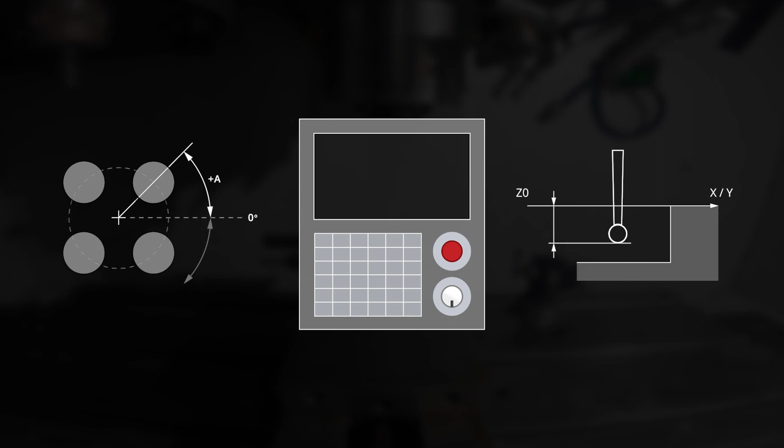To begin, we can open up Mastercam and our previous part file. For this example, we'll need to move my origin to the angled wall features so that way everything will match up. In order to do this, I'll make a duplicate copy of an existing plane and move our Mastercam origin.

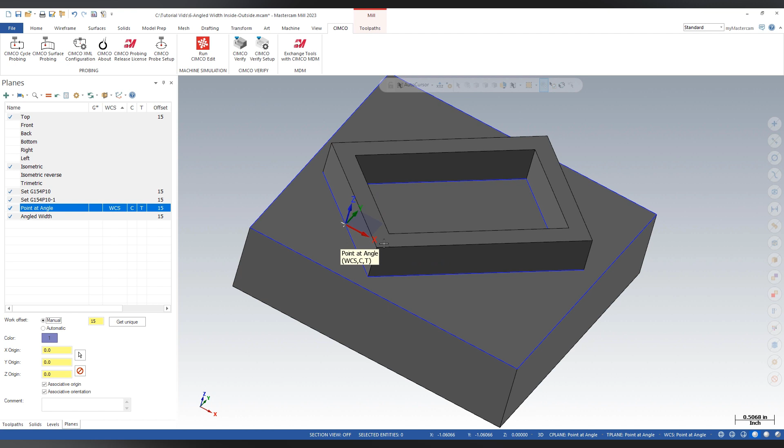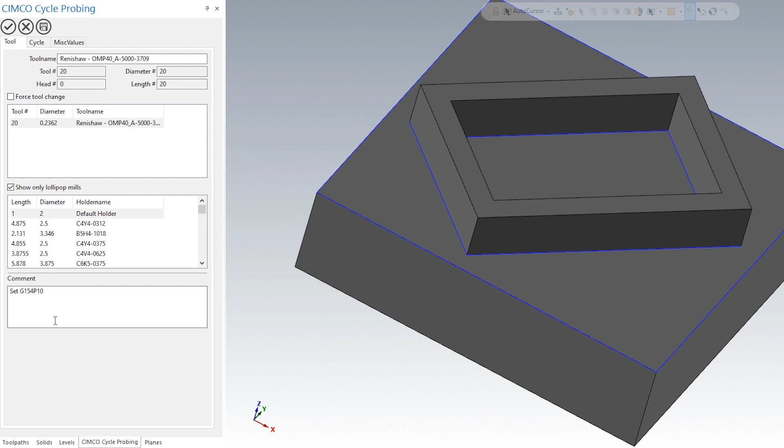We can now click on the CIMCO cycle probing icon located on our CIMCO tab and go to the workpiece datum category. We are going to start with the point at angle cycle. The workflow will be identical to our previous cycles, and because I had already selected a probe, we can bypass this and enter an operation comment if you wish. If you do not already have a probe defined, please watch our video tutorial on how to define a probe.

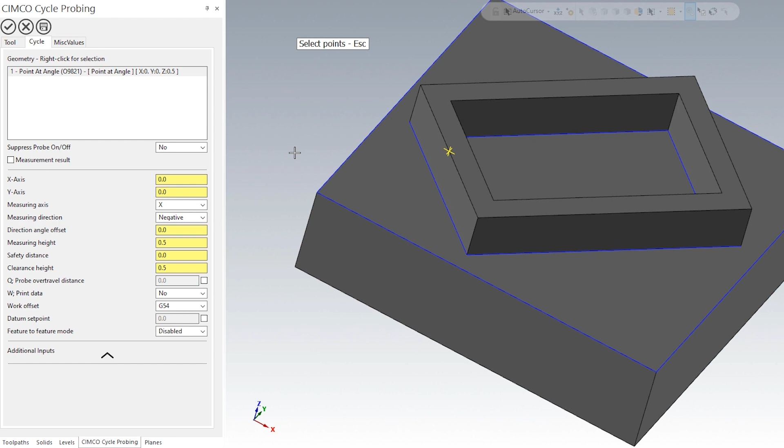Next, we'll click on the Cycle tab, followed by right-clicking in the Geometry section. You will notice that in this cycle, we have the option to select our geometry from points. This can either be wireframe and/or solid endpoints. Once we do so, CIMCO probing is associated to that geometry and we can start defining specifics to this probe path. We will set this up similar to our single axis probing cycle by setting our measuring axis to X and the direction to positive.

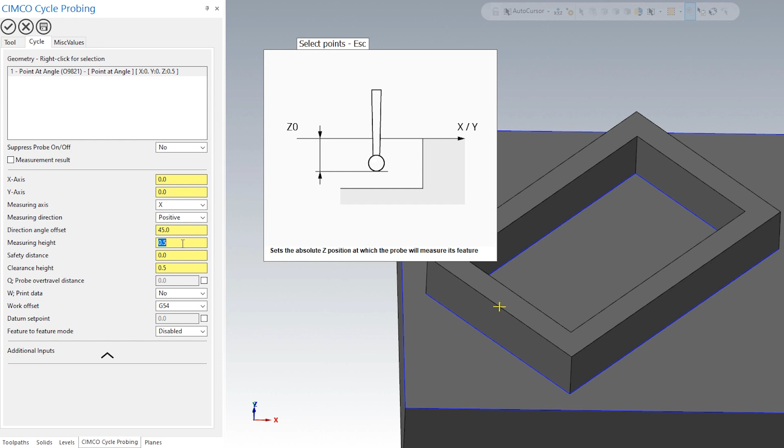We then can define the angle in which we wish to offset the probe motion relative to the current measuring axis and direction in order to probe perpendicular to the surface. We can then define the measuring height by simply typing in a number, using your right mouse button click menu and the option of Z coordinate of a point, or use our center mouse wheel to scroll up or down as this will increase or decrease the value. I will set mine to a positive 0.250.

I will then set my safety distance to a positive 0.250, as this will be the height in which the probe will stand off the surface and begin its probing cycle. Lastly will be my clearance height, which is the height that the probe will rapid to, from, and in between cycles. Now that we have the basic values input, you can see a visual of the probe path on your screen and can adjust any of the other values to get live updated feedback.

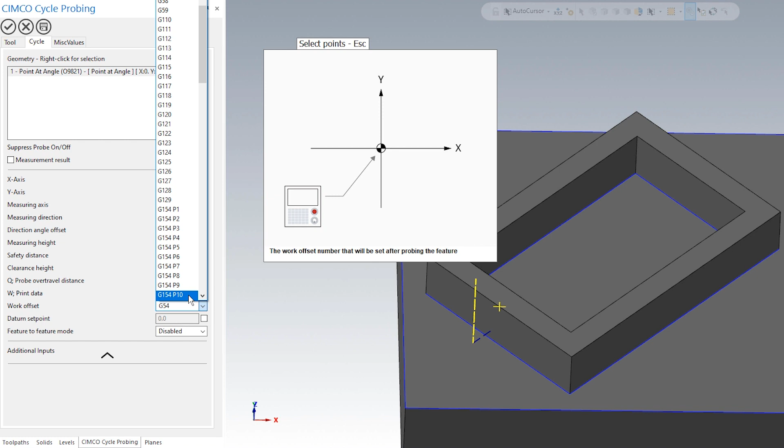We can set an over travel distance if you wish, as this will allow the probe to travel past the expected coordinate without alarming out, along with the work offset number that we are currently using and wish to update. In this example, we will use G154P10. Within the cycle, you also have an option to print data, which would print out a probing report based on your machine's I/O channel and parameters.

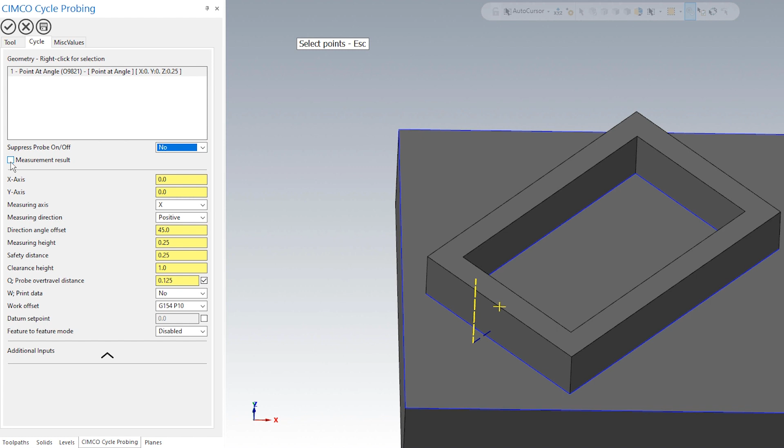We can also shift the work offset by a certain value after it is set by using the datum set point options. You then will notice the suppress probe on/off and measurement result tick box. The suppress probe on/off will keep the probe turned on while it's probing in between cycles and can be set per operation. Measurement result will allow you to copy the probe's results into specific variables on your CNC controller so they can be referenced later. This is especially important because the standard variables that Renishaw writes into are constantly being overwritten per probing cycle. The feature-to-feature option will be covered in its own tutorial.

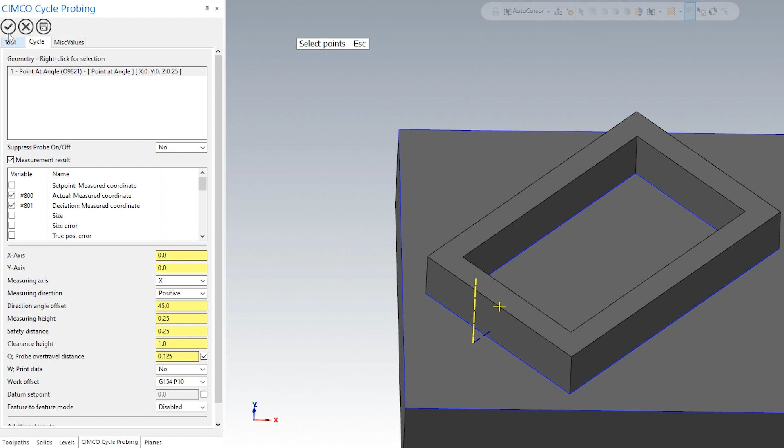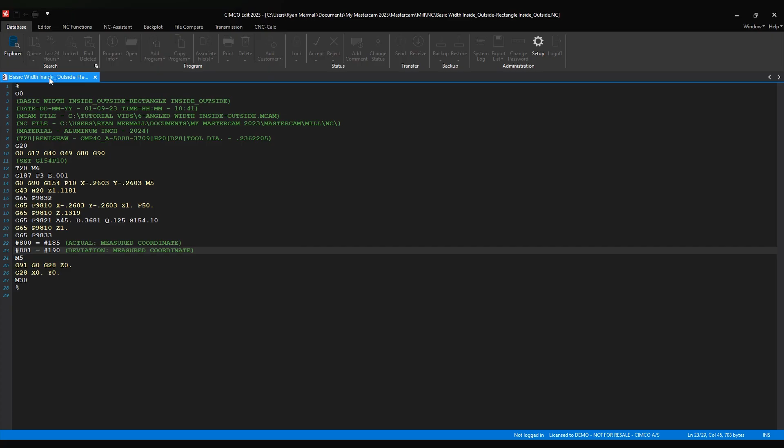Once you check out of the cycle, you can simulate it within Backplot, Verify, or Machine Sim and see how it looks. You'll notice that the cycle will probe at the defined point and angle, finding the reference surface position and setting it as my new origin location. Now let's post out the code to see how it looks and how it would run on the machine. Looking at the Renishaw Inspection Plus code for our Haas mill, you will notice that the program is nice and short and makes the code very easy to read.

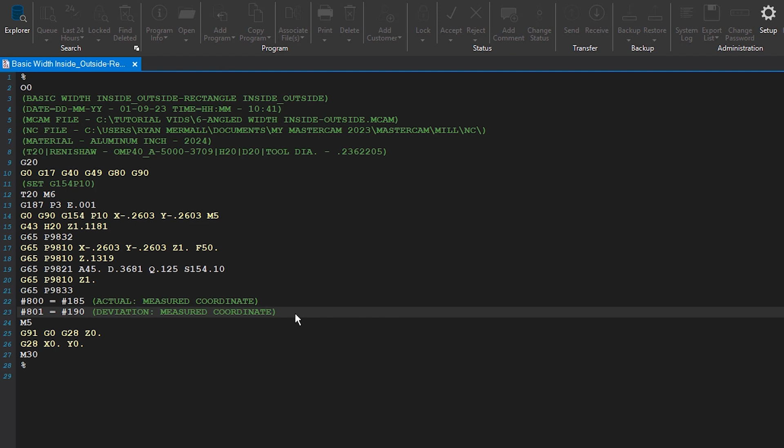As we go through, you will find the probe on and off commands, the probe's protected safety moves in order to approach and retract from the part safely, along with the point at angle cycle. Next will be our Q value, which defines the over travel distance, along with the S number, which is the work offset number that we are updating on the machine. We then will see the actual and deviation results, which are being copied into my user-defined variable numbers so I can display the results on the control or use them later. All this information can be referenced by the Renishaw Inspection Plus manual.